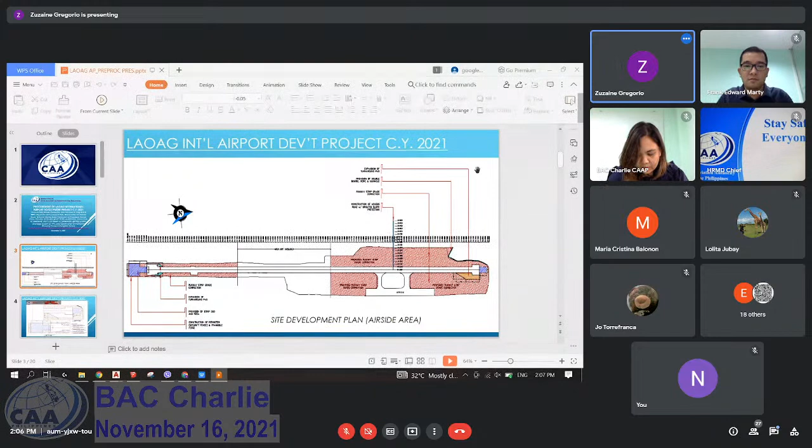For the pre-procurement of Laoag International Airport Development Project, CY 2021, the scope of the project includes the runway strip grade correction with provision of strip end and RESA, expansion of turnaround pad, construction of access road, grouted riprap slope protection at the proposed access road, provision of double barrel RCPC and manhole, concreting of additional VPA and exit road with additional lighting system, drainage system at VPA, and the construction of perimeter fence and frangible fence.

Before I proceed to the presentation of bidding documents, may I first present the approved plans for the said project. For the site development plan at the airside area, we have the runway strip grade correction, the expansion of turnaround pad, the provision of RESA, the construction of perimeter fence, the construction of access road with grouted slope protection, the runway strip grade correction, and the provision of double barrel RCPC and manhole.

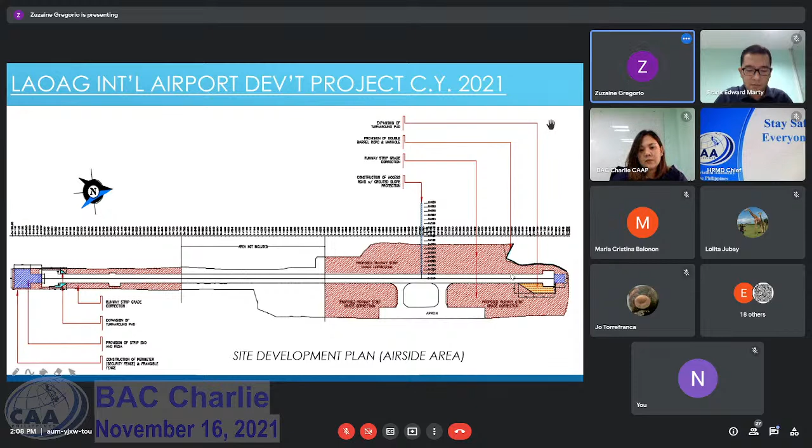Next is the enlarged plan for the said scope of work. We have the expansion of turnaround pad with dimension of 7,688 square meters, the provision of RESA with dimension of 90 meters by 90 meters, the provision of strip end with dimension of 60 meters by 45 meters, the construction of frangible fence at the approach area with the dimension of 102 linear meters, and the construction of perimeter security fence at the side of the runway strip grade with dimension of 240 linear meters.

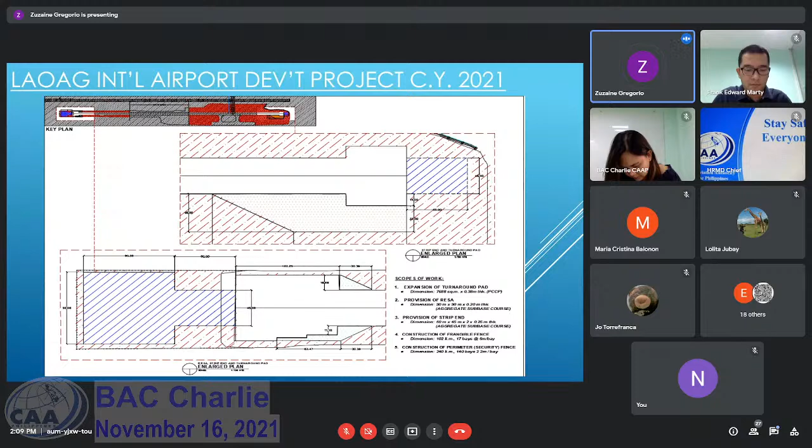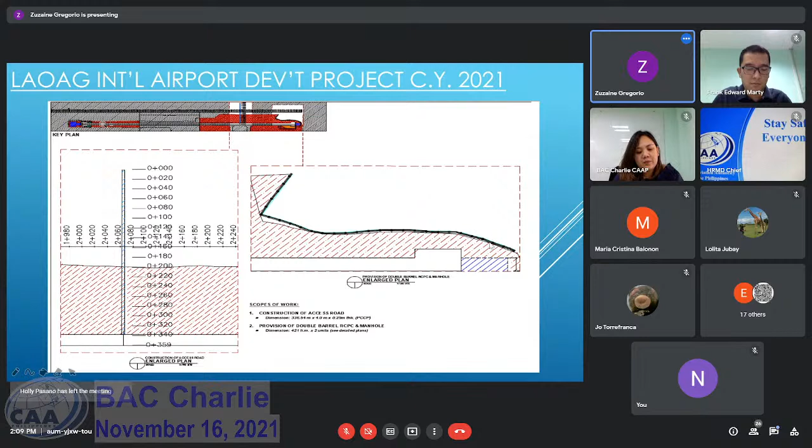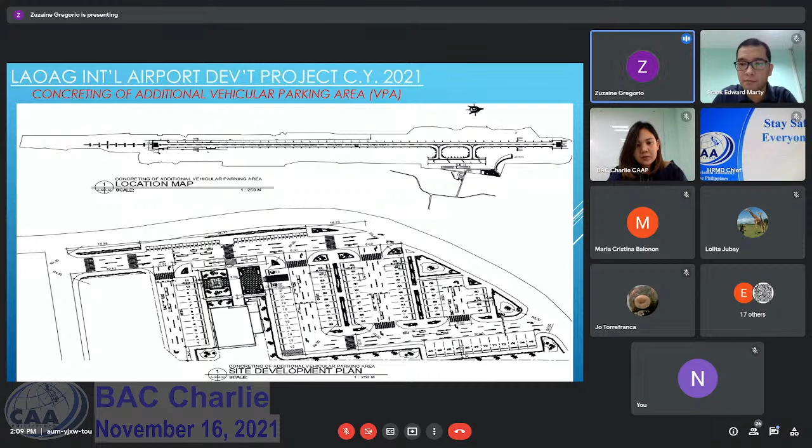Next is the enlarged plan for the construction of access road and the provision of double barrel and manhole. Next is the enlarged plan for the site development at landside area, which scope of work includes the concreting of additional VPA or vehicular parking area. Next is the enlarged plan for the drainage system at the proposed VPA.

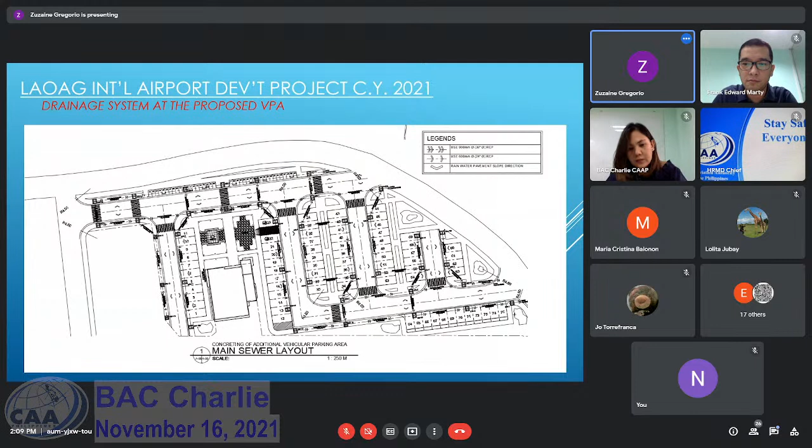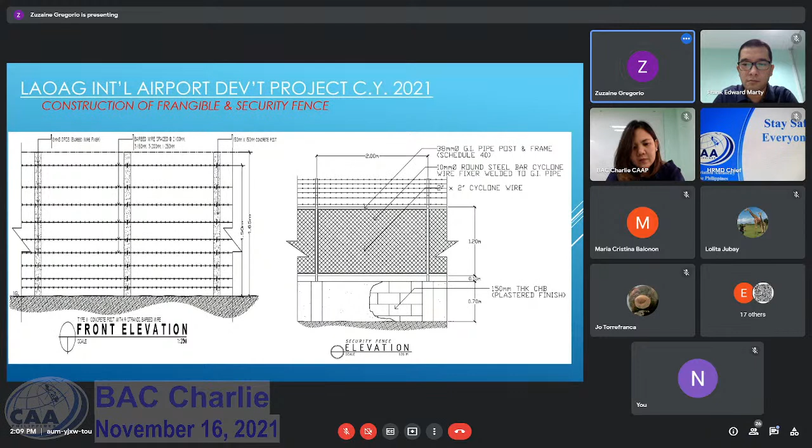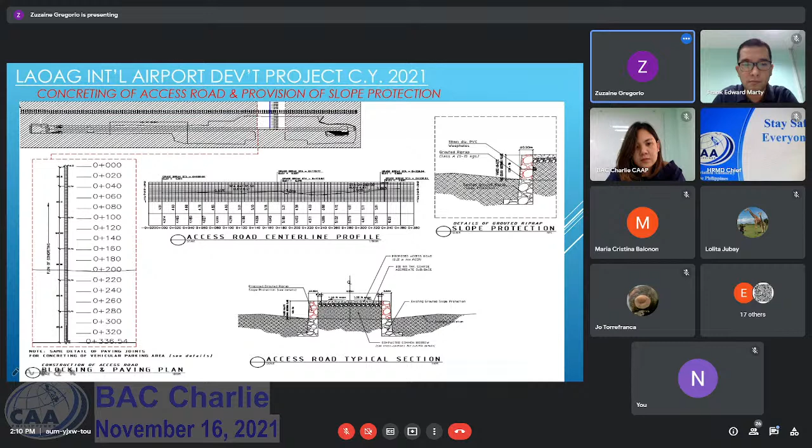Proceeding to the bidding documents. For the Laoag International Airport Development Project, the approved budget for the contract is 124,947,650 pesos and 99 centavos.

Prospective bidders should possess the following technical personnel, the equipment, and applicable license of Medium A, license category B for road, highway pavement, railways, airport, horizontal structures, and bridges.

Duration for the said project is 360 calendar days, inclusive of 21 rainy unworkable days. The bidding documents will cost 56,000 pesos, inclusive of 12% VAT.

For the bid data sheet, under ITB Clause 3.0, Certificate of Site Inspection, duly signed by Mr. Ronald V. Estabilio, Civil Aviation Area Manager, Area 1, or his duly authorized representative, is required to be submitted.

Together with the attachment: a copy of company ID of the person who conducted the site inspection, copy of the airport facility visitor's logbook, and picture of the proposed site, including the personnel who conducted the site inspection, together with the area manager or airport manager or his duly authorized representative.